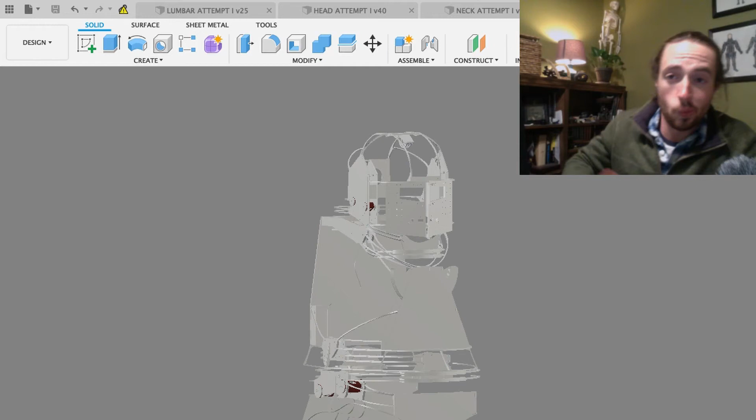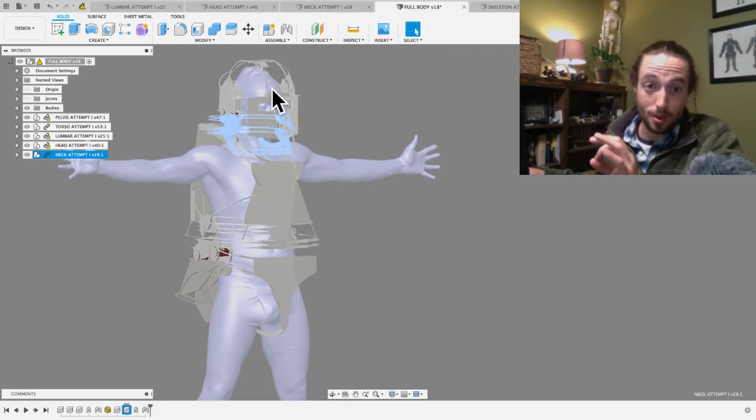This right here is a full suit. Today I'm showing you the neck in particular, which is that part right there, highlighted. I've finished that, and that's why I'm showing it to you. This is now the third file that I have completed and done.

There's 1, 2, 3, 4, 5 files in the torso, and the torso is the slowest moving part of the suit. Then I'll start on the arms and legs, but I have those pretty well figured out, so those should go much faster. Knock on wood, should work.

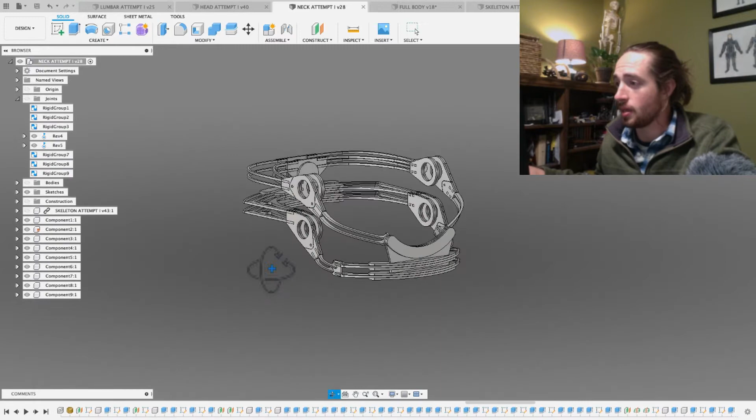Let's take a look here. Let's flip over to the neck and take a peek at that. I'm going to turn the joints on and show you this joint right here. I'll flip back really quick. This joint right here is this joint in here.

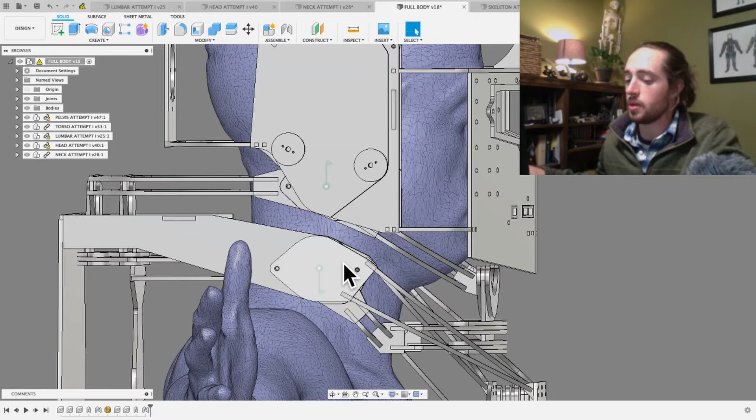If I turn this joint on, we're going to see that it moves like that. You can see how that would allow you to bring your head up and down. And then there's another one down here that's also in this.

This is what's called the sagittal plane of movement of the body. There's another one there. You can see how that allows the head to tilt and rock that way. This one will do the same thing the other way.

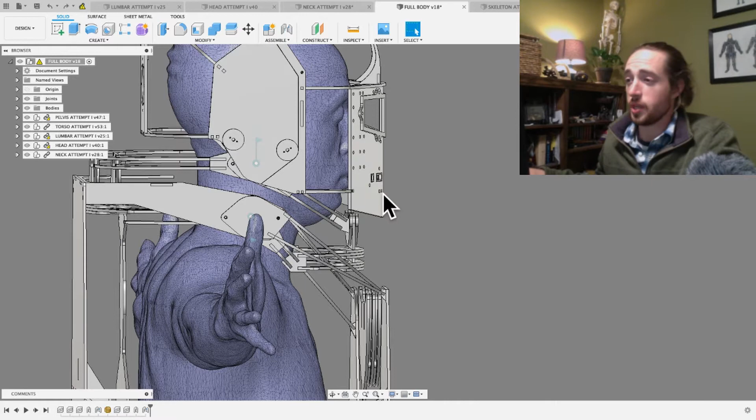For whatever reason, this isn't grounded right, and it's moving the torso instead of the head, but you get the idea — it allows for forward and backwards motion like that. So those are the two sagittal joints — that joint and that joint.

If I turn me on inside so you can see, there's that joint, and those allow for the head to rotate this way, albeit with less motion. This thing is a big, bulky suit, and even though I'm designing it to have a full range of motion, meaning you'll have the ability to move all your joints as you normally would, they won't move nearly as far, so it will limit motion a little bit.

But those two joints are there, and it comes from this joint around to this joint, and this thing is also a joint in here in those slides. Let me show it to you from behind first.

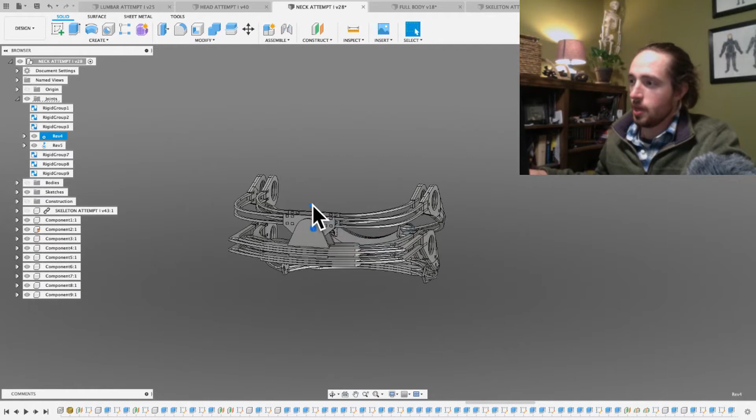I'm going to turn the body off, so just remember that I'm inside, and we'll come here, and this will rock backwards or side to side like that. There we go, it's being weird, but you can see how that'll give you side to side motion — tilting your head side to side.

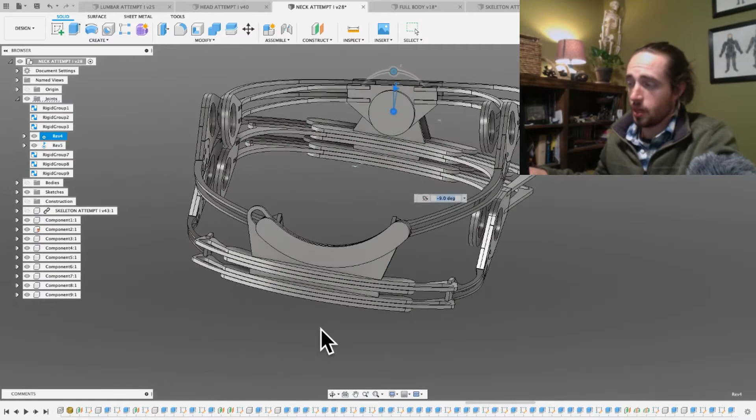If I switch to the front, you'll see this joint is hollow on the inside. That's because inside of here — well, you can't really see, but inside there's going to be a part, and this is going to bolt together. I haven't put the bolt holes in yet; I'm going to come back and do that at the end for the entire suit.

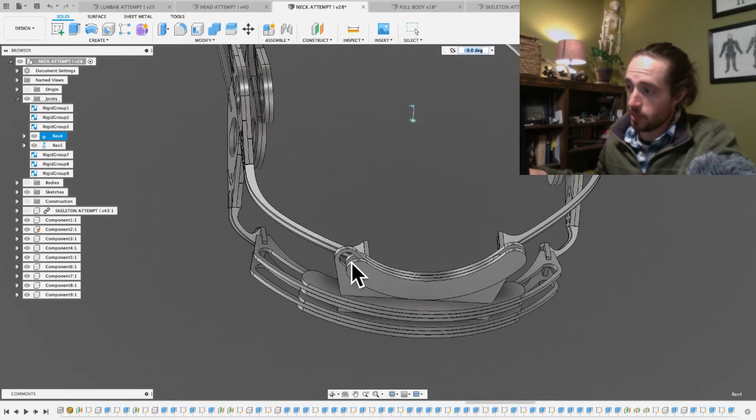This part will bolt together, and this part slides in here, with a little spacer to keep it from clamping down hard onto the part that's sliding. So there's a spacer, then a solid piece, then these two outside pieces, and those allow for it to rotate around the center of this point, rotating perfectly that way.

The reason for that is to keep it out of the way of my chin. You can see here how it rotates like that, keeping it from hitting my chin. Obviously, if it were there, it'd be right in the middle of my face because it's lined up with the back of the neck. And then also, you'll see...

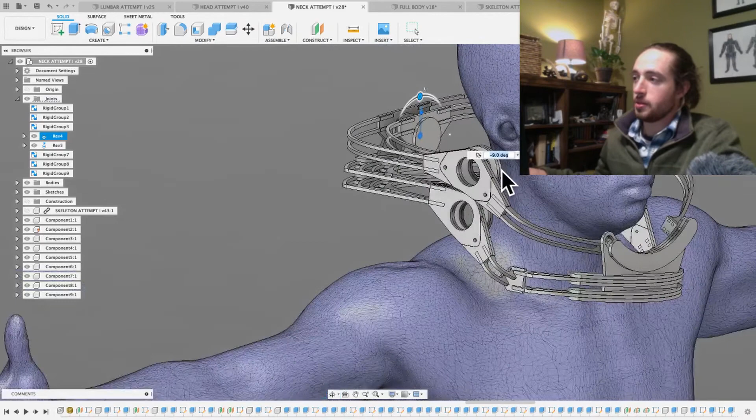This is a double layer suit here, and a single layer in the front.

And that's because you want the double layer - it gives it strength, support on both sides for the actuator that's going to be running in between these. It'll be supported on both sides and won't collapse as much that way, so it'll be much stronger, except from the front, that's not being done, just to keep bulk down in the front, because this is balling up and you're going to get a lot more motion than trying to pull backwards.

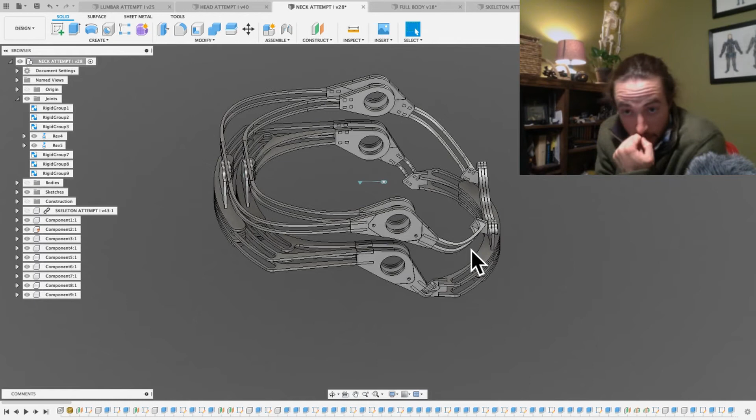So there's not really much motion in the back of the suit anywhere. There's not a whole lot in the front of the suit either because it does get so bulky, but it's much more in the front than in the back, and that's mostly achieved by keeping the front of the suit a little bit thinner than the back.

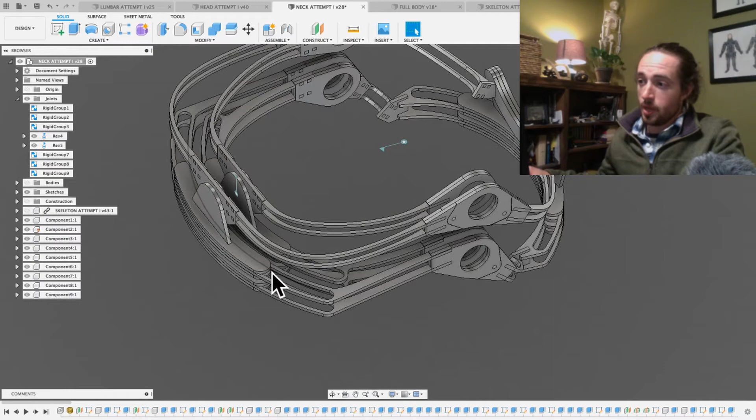And then the last one is the ability to go side to side like this. So this would be the frontal joint, and this is going to be the transverse joint, the one we're looking at right here. This allows it to slide back and forth like that, which is pretty cool, and allows you to look back and forth or shake your head no - same kind of motion. So pretty cool, pretty fucking cool, honestly.

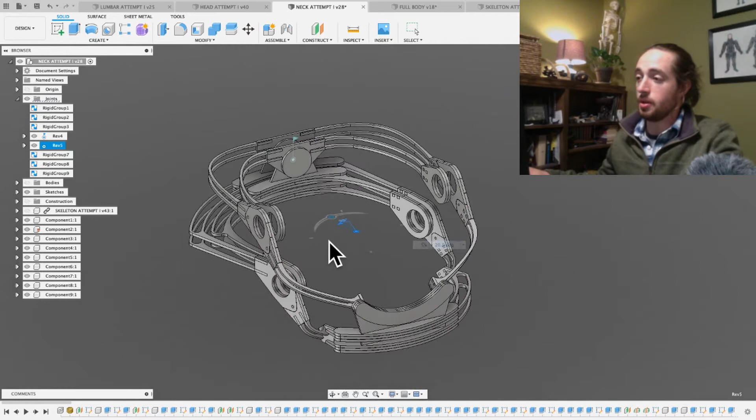This looks really good. It's actually just a smaller version of the lumbar. The lumbar is essentially designed in a very similar way, except it does have two layers in the front because there's more room there than there is underneath your neck - there's obviously a lot less room there.

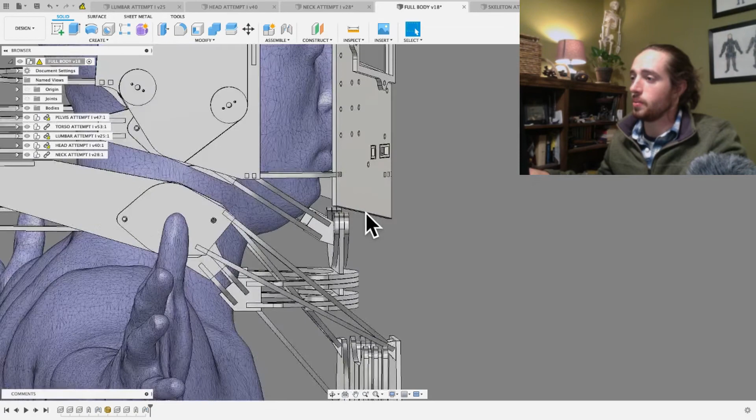So we can go back and look at it here. Oops, that's the head - let's look at the full body here. Here's the full body, and it lines up, it fits really well with the helmet. Now, it does not fit - there's a little bit of interference in some spots on the torso. That's because the torso is going to be redesigned, and I'm going to make this area just a little bit bigger to accommodate that neck. But it fits the helmet really, really well. You can see it comes in from the back here.

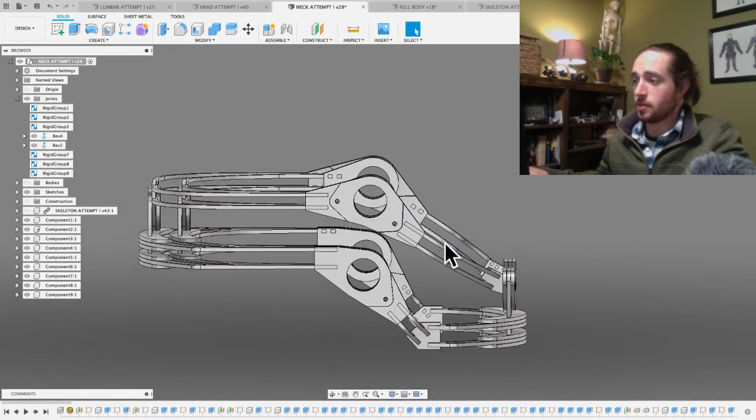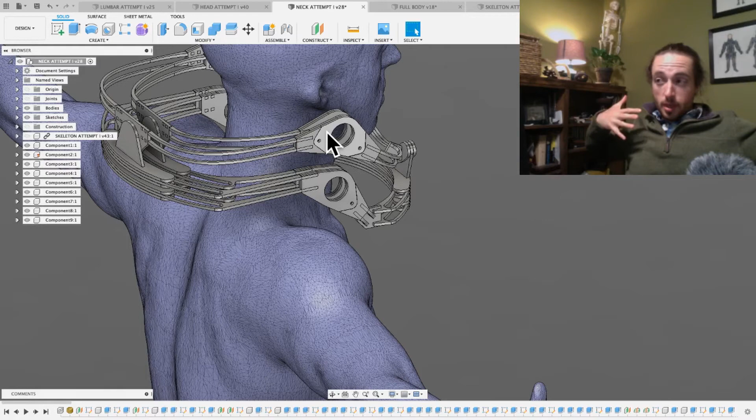One other thing I should show is if we switch back to the neck here - remember, that's me inside there. These bolt holes are interesting and important. So this deep layer of the suit, the back part, the dorsal part of the deep suit - there's deep and superficial - the dorsal part of the deep suit is what you're going to get into, and then the ventral part is going to come forward and bolt in. In the case of that, that's nothing on the neck.

And then both the dorsal and ventral part of the superficial suit are going to come together and bolt in. In this case, they'll actually bolt in separately here, but this is going to come in and bolt in here, and that's how this entire apparatus attaches. Then the front piece is going to come in as its own piece, and it's going to bolt in two spots here and here. And obviously the same thing is going on the other side.

So this piece will bolt in and put the back in, and then the front pieces - because this piece essentially doesn't attach to any other part of the suit, but this will attach right in here, to the torso, and go down. But this part, the front part - let me show you - this part right here, you can see how that is now separate. This part will be by itself, it'll be assembled, have all the joints in it, and it'll come in and bolt in with the two bolts like that.

So I am going to be bolted into the suit - that's how I'm going to put it on. It's going to be fucking crazy and awesome.

It's going to take probably like 100 bolts to put me into it, something around there. So that part, when the back is on, I'll step in, and then the front part of the deep part will come on, which doesn't include this.

And then the back part will come on, and the main parts of the front will come on. And then lastly, these kind of auxiliary pieces, like this part right here, will then come in and bolt in. So this part will bolt in towards the end, essentially, and bolt in underneath there.

Probably. Or it might actually have to go on before the torso because of the interference. So it may have to go in. The order of operations is a little bit up, I'll have to figure that out. But that essentially will come in before the torso, but that's the idea anyway, right?

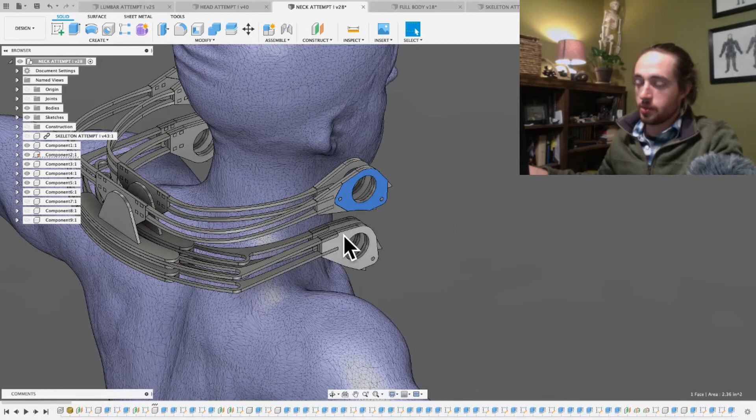So that'll come in and bolt in there, and then this will come in, and this will actually be attached. This will come in with the torso because it'll be attached to the torso there. And then lastly, this front piece right here will come in and attach in. And that's the order of operations to put this thing on.

Pretty cool, huh? Just the fact that it comes in so many pieces, it's very Iron Man-esque. If you look at some of the suit-up scenes from the first movie where he's putting all that on, it comes in pieces and stuff, and there's a reason the people who wrote the movies and comics wrote it that way, because that's how it would actually go together.

Because you have to design a suit like this in pieces, essentially. Eventually I want to get a suit, maybe Mark 5 or whatever, where I'll be able to step in, it'll just open up, and I'll be able to pop out of it like Tony Stark, and then come back into it. It's possible, but for the first one, it's going to be bolted on in many pieces. It's probably going to take a while to get on, but it's going to be really fucking cool.

It's going to be water jet cut out of a solid sheet of 1/8 inch aluminum. And then it's tabbed. If you couldn't pick that up, it's made out of a flat sheet that's tabbed together. And then I'm going to come in and weld those tabs together with a TIG welder. I have a bunch of videos on TIG welding aluminum you can check out as well.